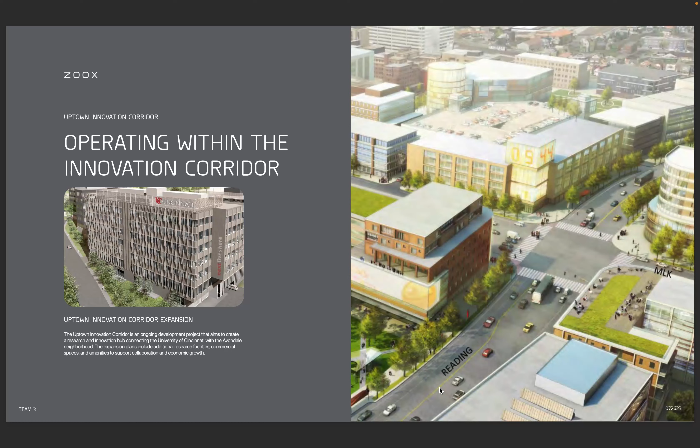So let's look at the current state of the Cincinnati area. For our project, we were operating within the Innovation Corridor, the area outside of I-71 that goes along MLK and basically borders UC campus. For the social, technological, economic, environmental, and political factors, it's very typical of an urban area around a campus.

Most of the user base is students and also people who work at the hospital. Looking at demographics, we divided into three groups: residents, students, and visitors. We have a lot of people who come from out of town just to explore Med Campus, and we also have a large base of students who go to UC.

Looking at the field, we noticed there are limited bike lanes, large intersections, and a lot of bus stations, so it's not very conducive to micromobility in a lot of areas. There's a lot of old and outdated defaced city property, and then there are red bike stations which don't get a lot of use. Next, we're looking at the current state of micromobility.

In the future of micromobility, we really want to design our system to bring back first-time users, focus on experience, and create attractive branding. All of these factors will help push our system forward and make sure it's a unique system that can be used by our user groups.

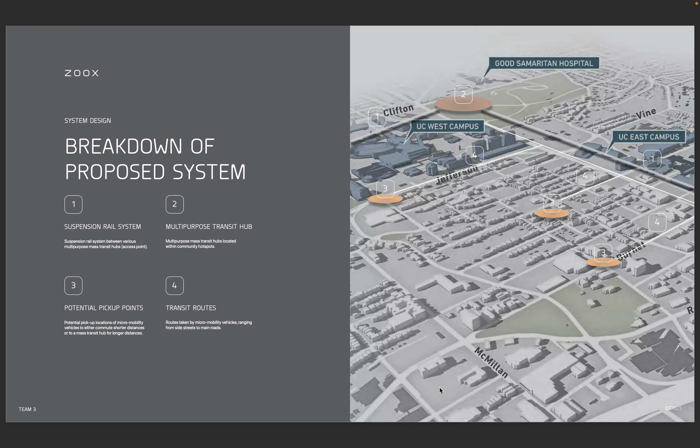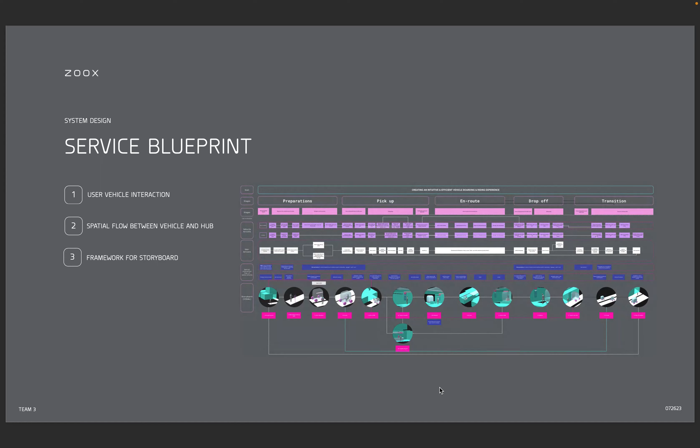A quick overview of our service blueprint - we created different key points of user interaction trying to identify the touch points and interactions that will move forward into our design ideation phase. We validated those interaction points by creating a physical mock-up of the vehicle, understanding the physical constraints of the space, and identifying what the touch points need to be and what design elements need to be incorporated into our design.

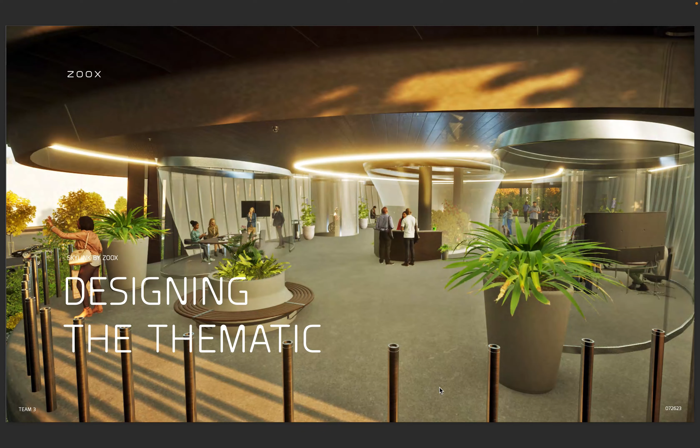Now that we have all that, we're focusing on designing a thematic for the entire project. For the project, we developed 3 main CMF themes, and from that we selected one.

The first one being theme A, which is neo-futurism. The keywords behind this theme are flow, connect, and advance, and this one is the most true to the original Zoox branding - very future-forward thinking and focused on those kind of neon blues and purples.

Our second CMF theme is called Revive Modernity. The keywords for this would be accent, minimal, and directionality. The idea behind this is a minimal, white or black finish, and then the main focus or touch points within the vehicle or spaces you're operating within would be highlighted by very bright, vibrant colors.

Finally, CMF theme 3, which is the theme we decided to move forward with, is called Tonal Tech. The keywords for this are embrace, integrate, and element. The idea behind tonal tech is essentially to bring earth tones and warm glows that can only be found in interiors and bring them on the road with you, enhancing the user experience by integrating those meaningfully. From that, we developed a mood video, which we'll showcase later.

Behind the tonal tech, we did even more materiality research and goals, from which we derived 3 main points we want to focus on: 1, light as a device; 2, integrated functionality; and 3, sustainable innovation. Focusing on those, we did more trend industry research.

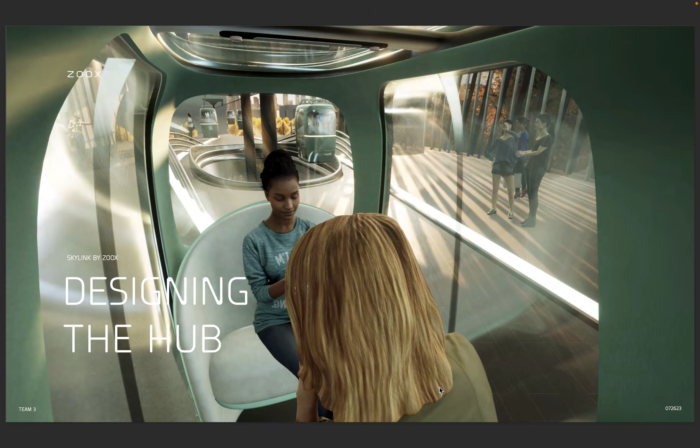Finally, CMF planning and sourcing. It was very important to us that we were rooting this idea in reality, so we went and found various sources on the internet and sourced individual products to derive each of our actual components in our hub and vehicles. All right, designing the hub.

I started off the ideation with abstract imagery, focusing on some of the Zoox brand language, but also extrapolating it out, looking at organic forms that are naturally occurring, as well as looking at a start of CMF with glass and greenery, having interior courtyards and soft forms throughout the entire hub.

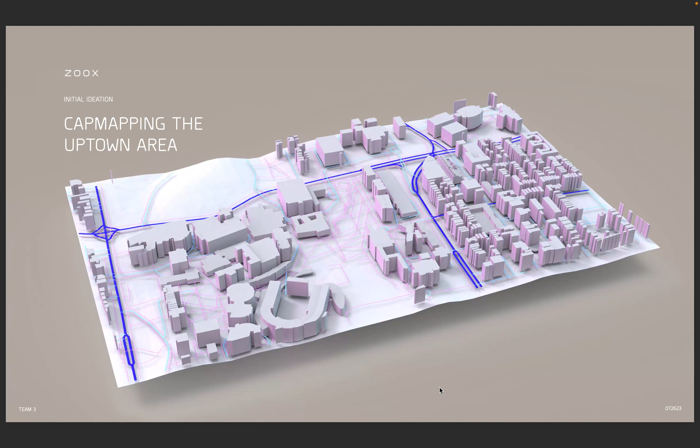Using CAD Mapper, the team and I looked at the environment we'd be designing in, and we saw that the Burnet area is an area we could incorporate our design into and connect it with the innovation Uptown corridor and also campus, as well as getting more downtown with our gondola system.

Gravity Sketch played a large part in the ideation process, doing iterations quickly off of that CAD mapper data, and allowed us to see proportions, user interactions with the ground units and the gondolas, as well as how the Skylink system, which is our gondola system, would work and interface with both users working in the hub and users using the hub for transportation.

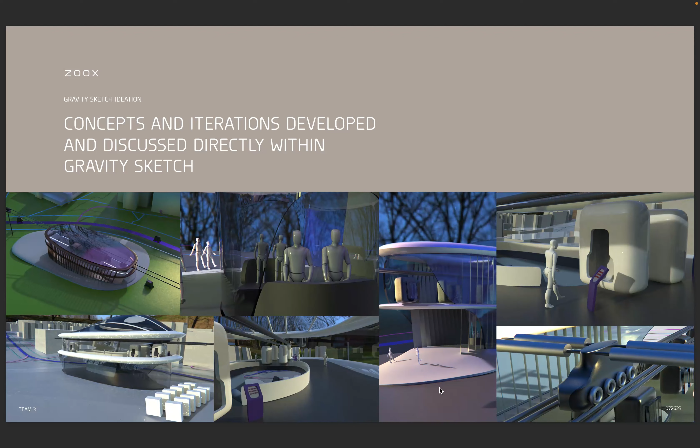Here's some continued concepts showing the breadth of work in Gravity Sketch, and then also finished Keyshot scenes that I worked on with Friedrich to start applying some materiality to get a grasp on what the final result would look like.

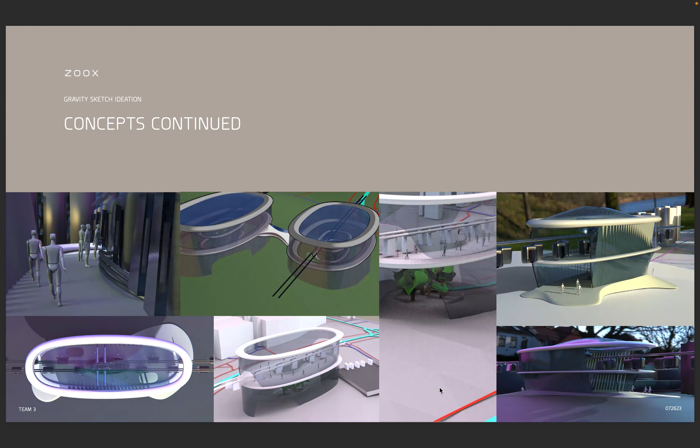Moving into sketching and doing iterations from Gravity Sketch to sketching, we finally laid out a form where we have these ribs lining a glass paneling, with an upstairs for the gondola, a downstairs for commerce, and some unique topology to Burnet that would encase the entire hub.

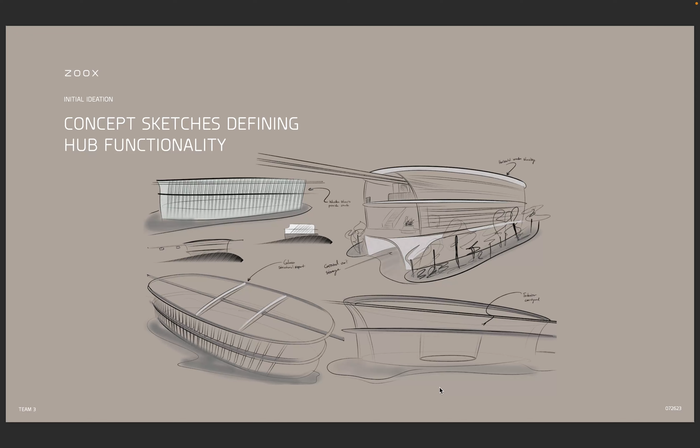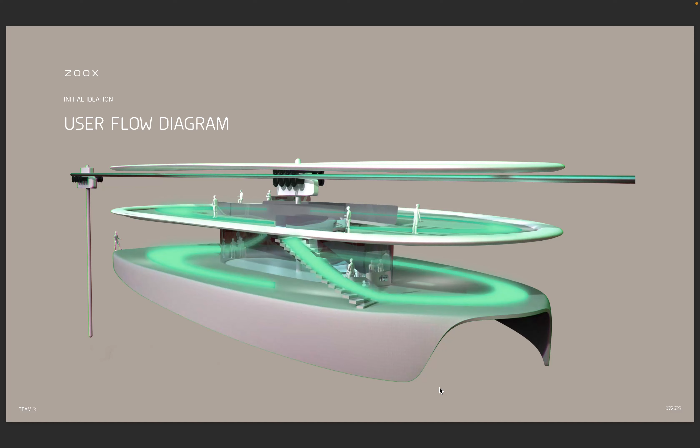As Quinn mentioned, development was very rooted in collaboration, and you'll see this even more so in our vehicles, making sure that everything we're developing is aligned with our thematic as well as our original users and their pain points. From there we iterated upon all these different hub designs and landed on some major themes that we want to focus on.

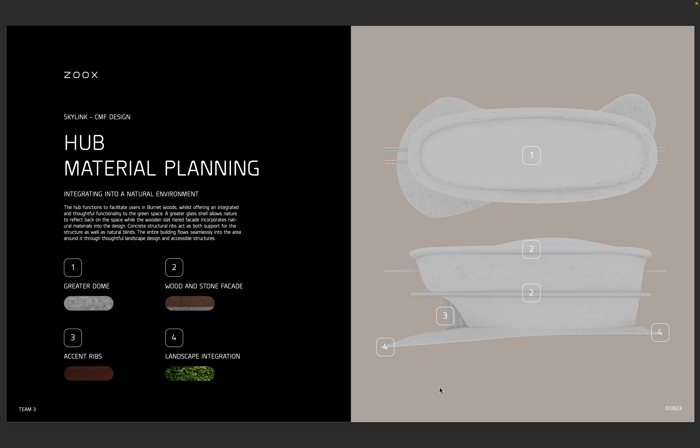We focused on the idea of integrating into a natural environment, especially using materials like glasses, wood, and stone. As we mentioned, developing this concept in Burnet Woods, a large aspect of this project will be making sure there's a thoughtful aspect to the landscape integration.

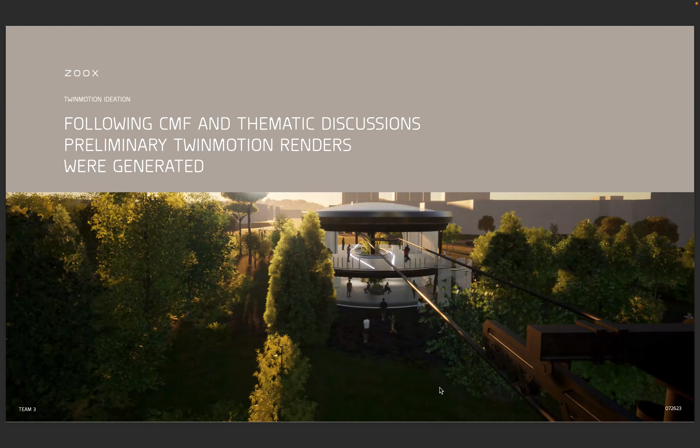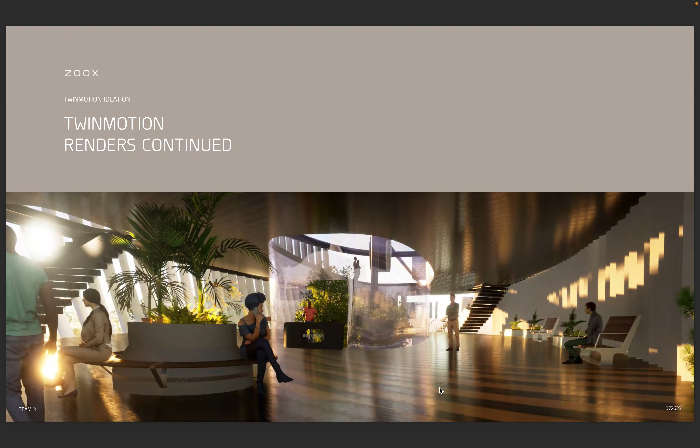The hub will be divided into two levels, like Quinn mentioned earlier. For the bottom floor, they'll have a different functionality not tightly related to the mobility side of the user experience, focused more on creating a space for productivity, hangout, and recreation.

I worked with Friedrich a lot in the collaboration on this Twinmotion model, looking at materiality changes, how we could incorporate light and provide shade, but enough light for the inside of the hub. We came up with these ribs that align the glass, which could be articulated and work with the sun to provide the optimal amount of light inside, allowing users to walk around and feel connected to the space, as well as lighting effects.

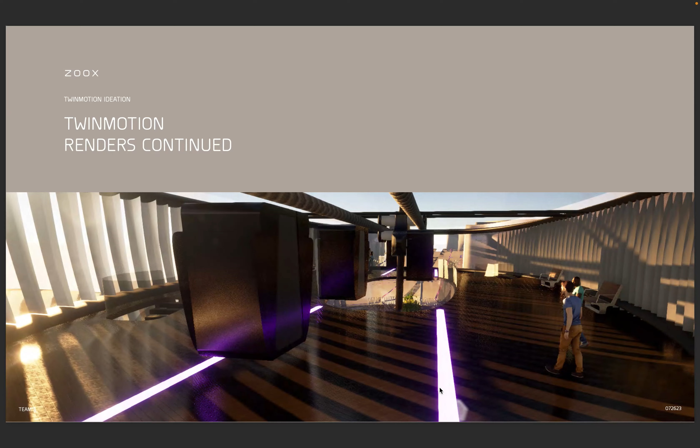They had a big portion of the ideation looking at how we can incorporate light both in the gondolas and in the hub to give a personalized user experience.

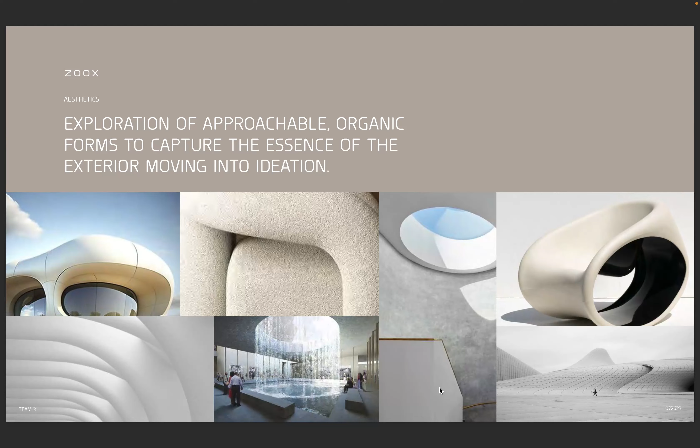Starting with the exterior, I started developing abstract forms, going back and forth with Gravity Sketch and digital sketching. Then I refined those forms a little more and made them more Zoox-like.

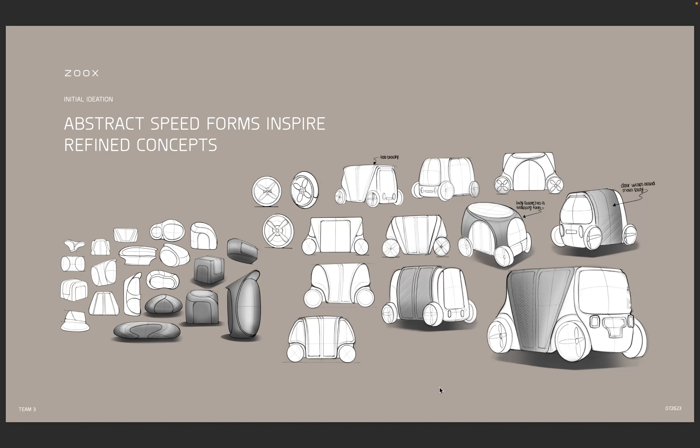For the interior, we kind of mirrored the exterior a little bit. It's symmetrical, with two facing seats that seat against each other, and plenty of room for users to move around.

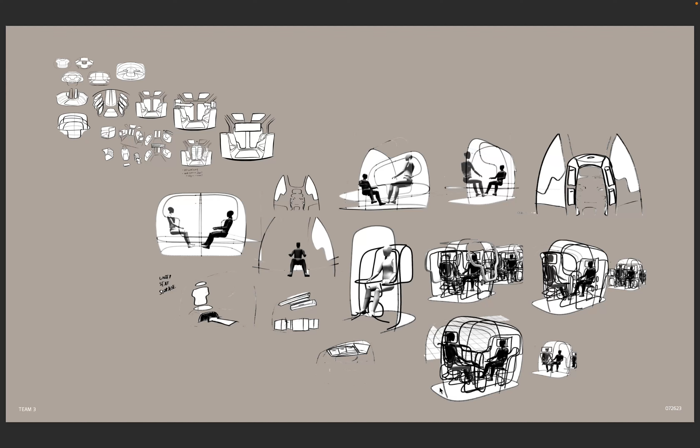Moving forward with the exterior, I refined the concepts further, and we settled on this concept of having the ground vehicle almost flip to be the rail vehicle. The form language is very similar, so they complemented each other well.

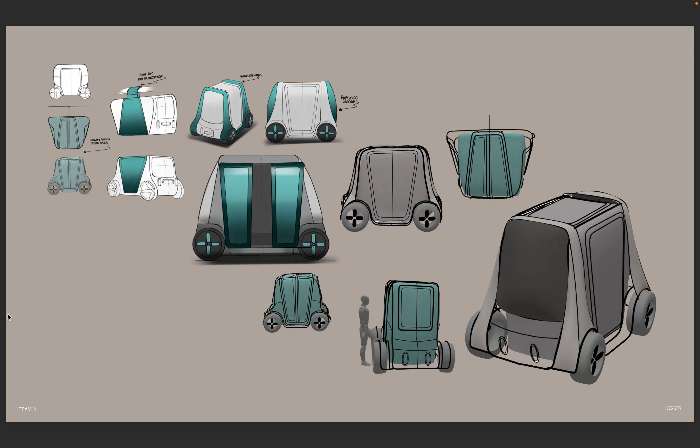From there, I ideated more on different features like the doors and the design of the windows, then went back into Gravity Sketch to finalize some surfacing before taking it into Blender. This was the final sketch concept I did for the ground and rail vehicle before refining it further in Blender.

Moving forward on the development of the CAD for the interior, I went from designing a very sharp, minimalist look to a more fluffy, welcoming one, which mimics the brand language of the bubbly Zoox brand.

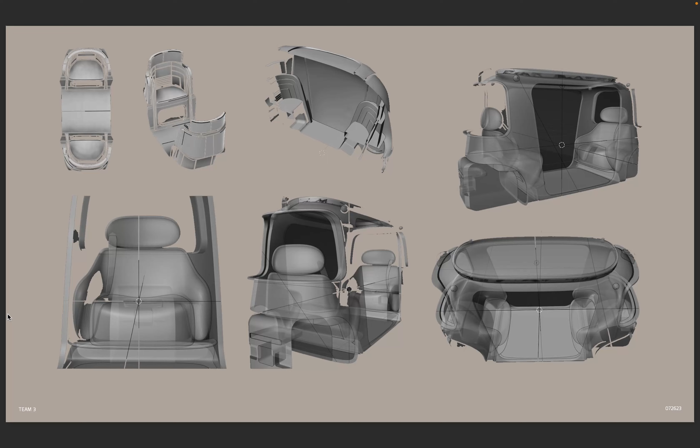This is the final package for the Evo A unit, which is the rail vehicle, and this is the final vehicle package for the ground vehicle. The ground vehicle is a little bigger than the rail vehicle.

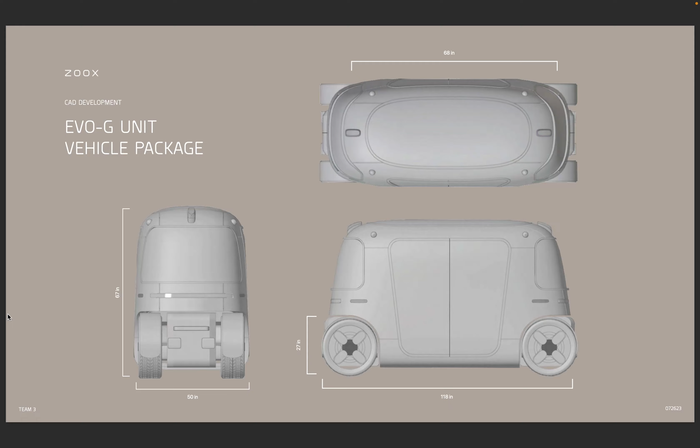Back to the collaborative element, we looked through a lot of different materiality options for the exterior and landed on something true to the theme of the hub, but also individual to the actual vehicles, as well as loyal to the Zoox branding, bringing in large glass windows, a satin to semi-gloss painted metal frame, subtle lighting elements, and a focus on the iconic rim design.

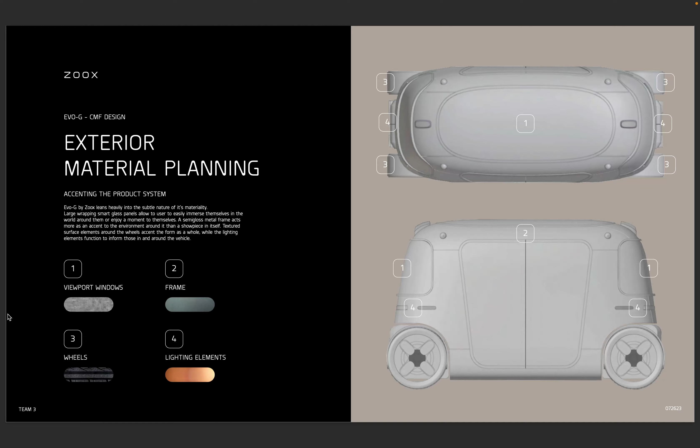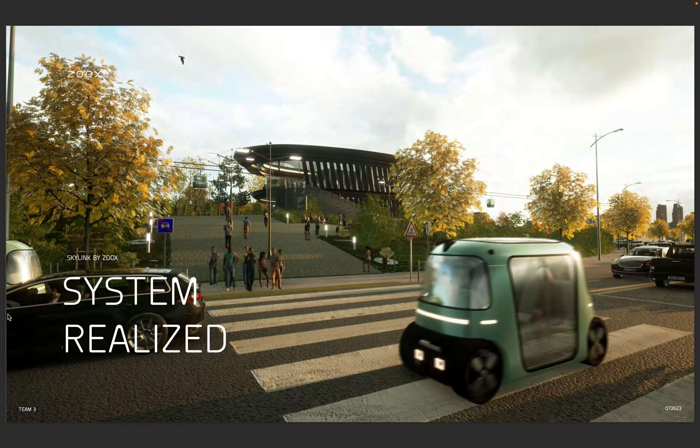The ground unit essentially handles pickup and drop-off for the user, whether taking them to their final destination or to the hub for transit.

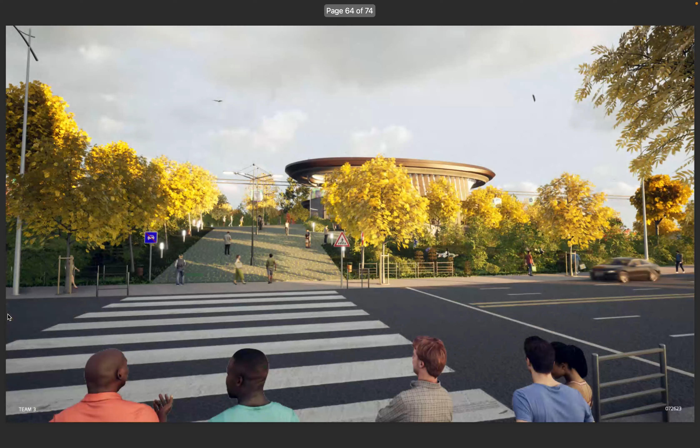Here's a quick snapshot of how the hub looks, located in Burnet Woods. Once the vehicle arrives at the hub, users will be able to access both levels.

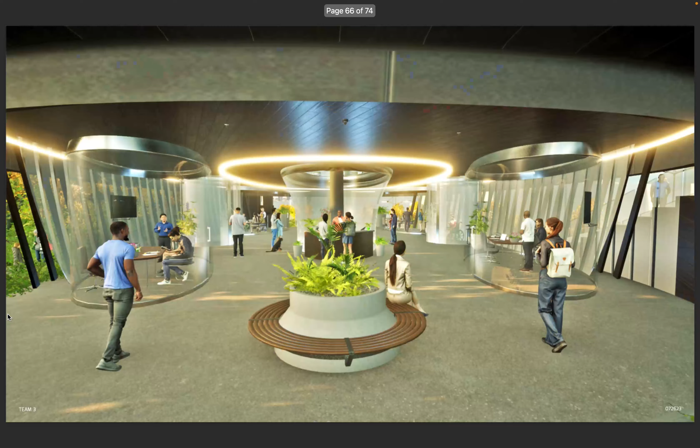Looking at the first level, key design features include natural integration with plants everywhere inside and out, several breakout rooms for both user groups and UC students to use for studying or general commerce, a help kiosk, and a central courtyard that also helps hide the pylons incorporated for our Skylink gondola system.

There are also security cameras on the ceilings, because it is Cincinnati and Clifton, so we were looking at the safety aspect as well.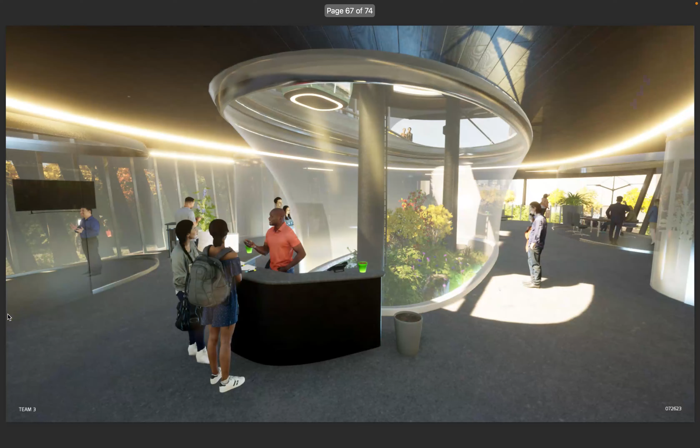Here's a more detailed look at the interior courtyard, and a help kiosk for any first-time users going to the hub who need help getting around.

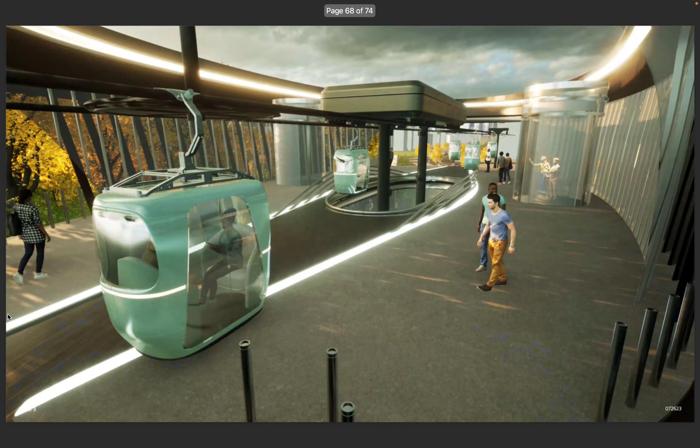Here is the second level. You can see on the left and right side the elevators that go up, as well as people getting in and out, and safety guidelines that help users avoid crossing into the gondola's path for added safety, along with the Skylink system, composed of a system and subsystem.

The gondolas are able to stop and allow users to get in, then hop on a different line and head to their destination on the Evo A.

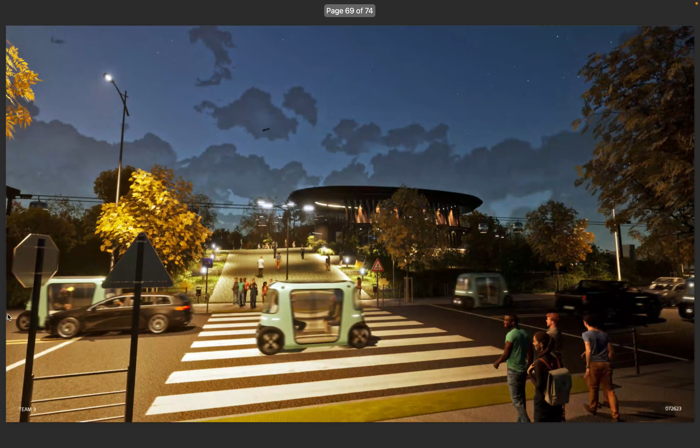This view gives you a good lighting scenario. We were also aimed at safety for this project, so being well lit at night is pretty important for all users.

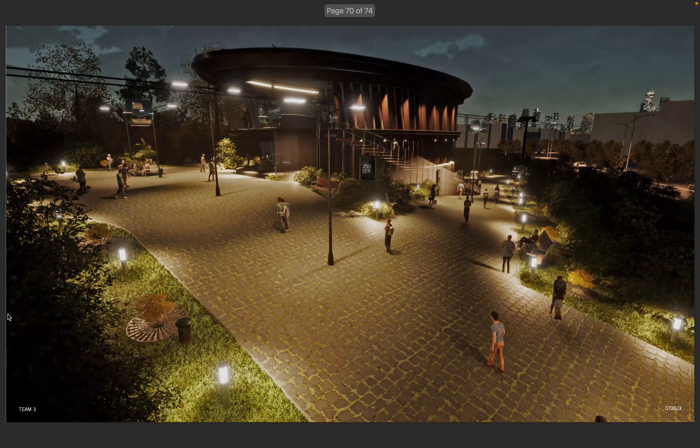This is a view of MLK and the Burnet Woods area with our hub inside it, showing users crossing the road. Here's another view looking at the pathways that Jimmy and I created in Blender and later rendered in Twinmotion, well lit and with a bit of Zoox branding on the outside infrastructure.

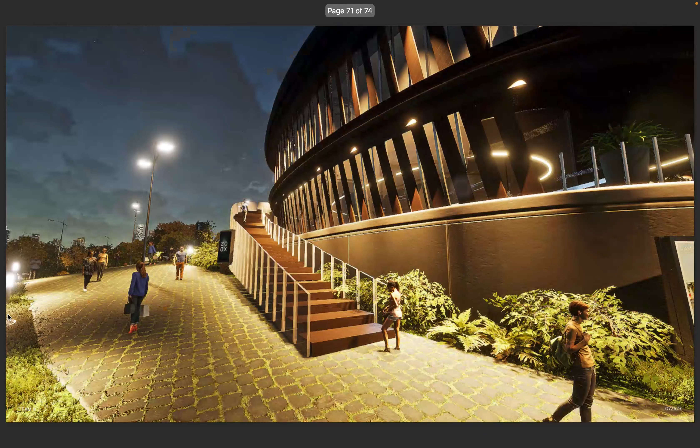This shows the staircase that goes up to the second level, as well as people heading towards the east side of the station to reach the ground units.

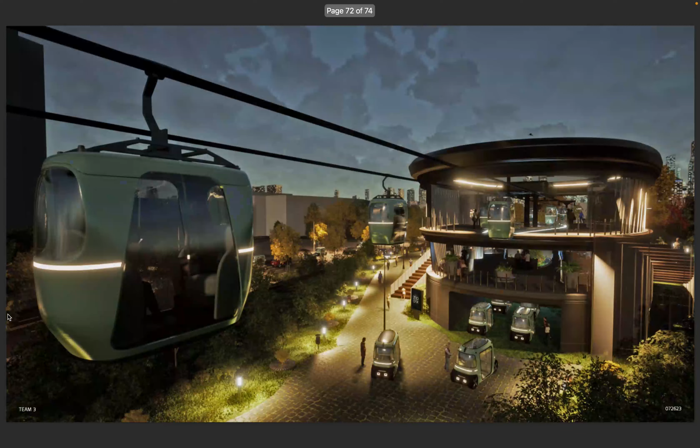This shows the east side, where the ground units are housed on the lower level, as well as people getting in and out of the Evo B ground units.

Thank you for viewing. We were Team 3, and we hope you liked our project.